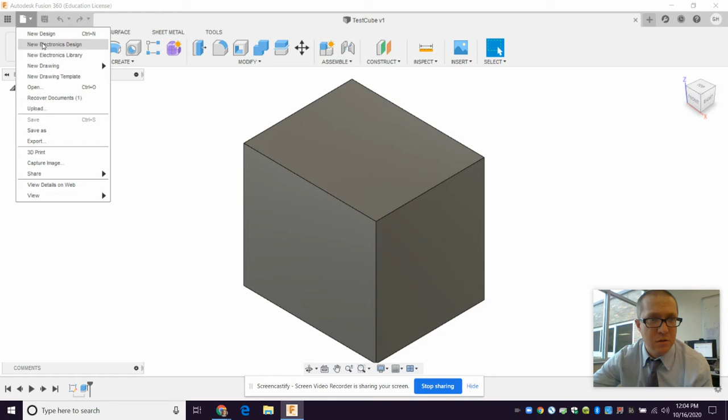You're in your part. You want to have your part open that you made. You're going to go up here to File, New Drawing, from Design. This little window pops up here. This is our usual options menu that seems to show up in Fusion 360. Contents, full assembly, create new, from scratch. We're not going to change that.

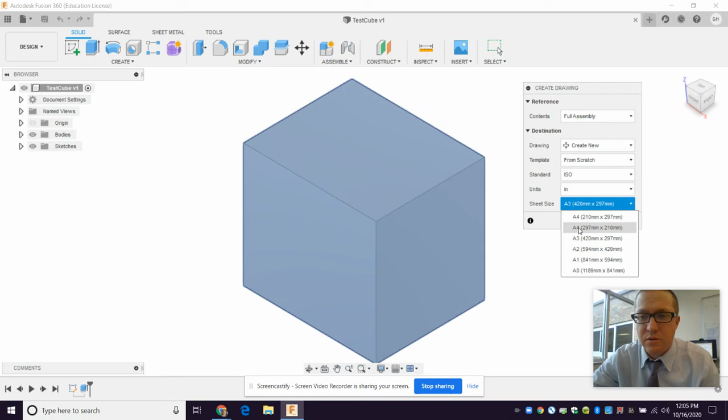Standard units, we're going to change to inches. And sheet size, we're going to change to A4, 297 by 210, which is standard 8.5 by 11 paper, but oriented so it's horizontal landscape. Now we hit OK. Takes a minute the first time you do this. I noticed that it gets faster the second time you do it. This is our window, our drawing, what it looks like.

It's got this huge box down here that we're going to get rid of actually. And then we can place our views in here. So we're placing the base view right now, the base view. This is a little bit different in Fusion 360 than it is in Inventor, but I'm going to go ahead and place the view first, and then I'm going to show you a couple things.

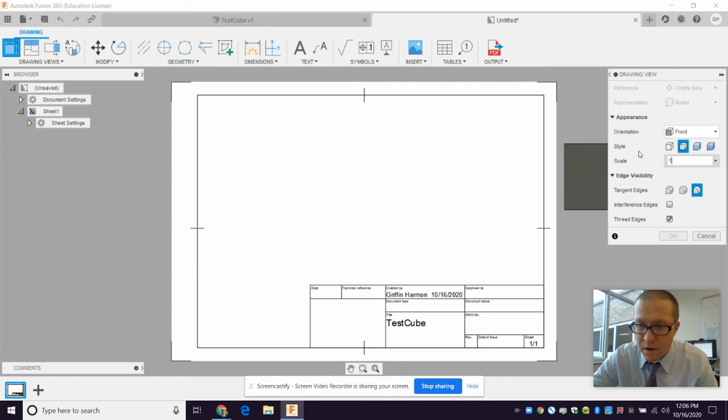Now notice it's kind of small. I might change the scale over here. You click that, you can do 1 to 1. Or if it's way too big, you can just type in like 0.75 or 0.3, and that acts like a multiplication factor. So I just want it to be 1. I'm going to place that base view right there. And the base view is always this front view. The front view must always go in the left bottom corner.

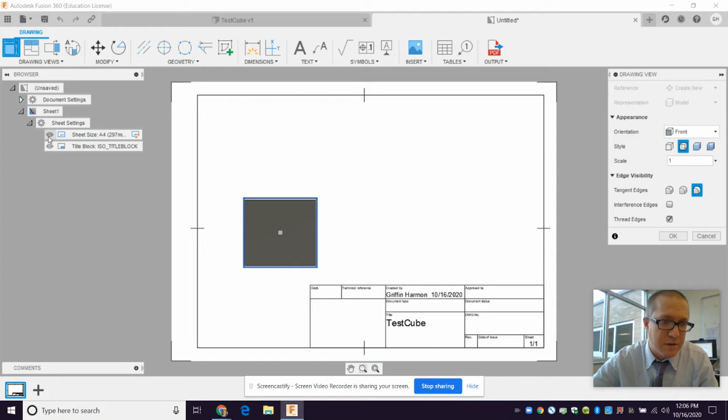All right, so now I want to get rid of this box here. That's over here under sheet settings, right here. I just turn off the visibility. I really love this, the way this works in Fusion 360. I just wish Fusion 360 ran a little faster on the computer. I don't know why it doesn't. Maybe I need a graphics card. But anyhow, turn that little eye and it gets rid of that visibility so you don't see that thing. Now I'm going to move this down a little bit. It doesn't do this very smoothly.

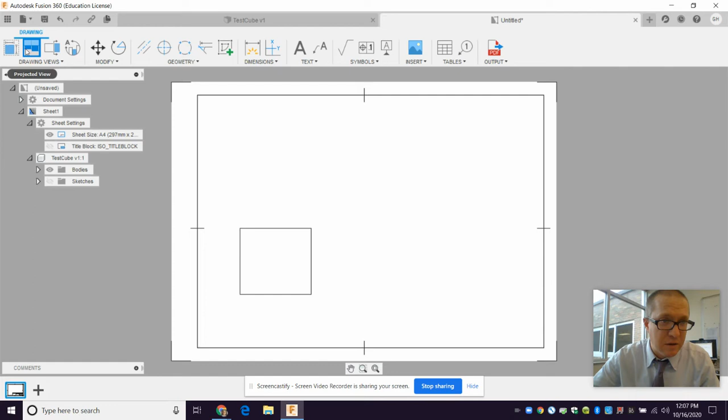And now I'm going to place projected views. So that's the front view. I need to place the top view, the side view, and what's called an isometric view up here. So I click projected view, and I have to click the parent view first. And then I drag up here, and that's going to show me what the top of it looks like. And then if I drag over here, it's going to show me what the side of it looks like. If I drag up here, it's going to show me what it looks like from kind of a weird home perspective. I might change that later on.

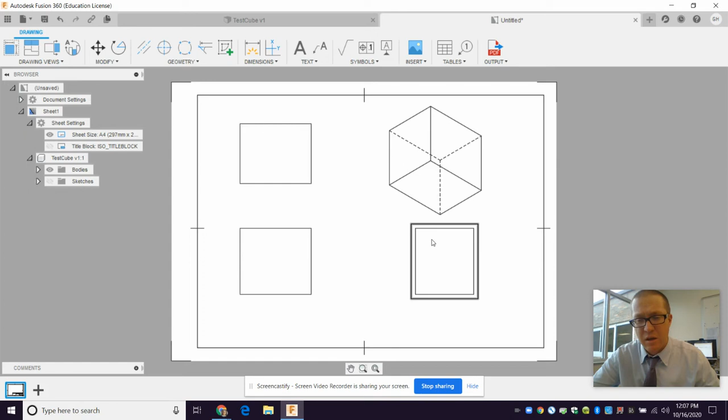And then when I'm done, I can either hit escape, I think, or the check marks. Let me try escape. Yeah, escape. Just like in Inventor Professional, for those of you that have switched back and forth or have used Professional.

So anyhow, here we are. If you want to move stuff, you can. Notice when you move this, it moves the other things that are fixed to it as well. Might move that over a little bit. Can't just put this anywhere, right? You can only move it left or right. It has to stay lined up with the other one, which is fine.

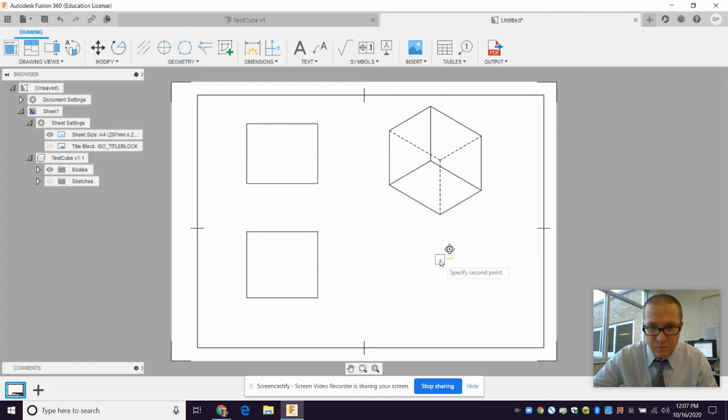This is a very boring looking mechanical drawing because it's just a cube. For this one here, I'm going to double click on it, and then I'm going to turn it on to be shaded. All right, so now I can see the whole thing.

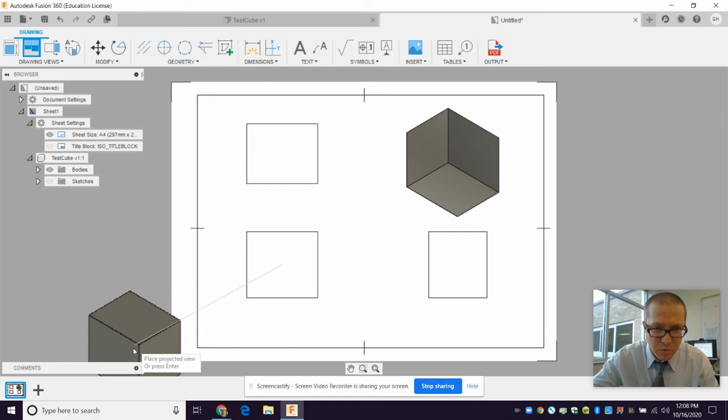And hit close. All right. I'm surprised you can't change that view here, but that's all right. It's kind of a weird view. I don't really love it, but it is what it is. I wonder if I did a projected view of it this way. Yeah, that's the way I would like it to be actually up there. So it's looking at it from that perspective, not from the bottom. Anyway, that'll do. This will just have to do for now.

So now I'm going to add some text. I'm going to add a text box down here. And it wants you to draw it, unfortunately. And then I type it in. Mr. Your name, not mine. Engineering 1, logo project. That's what you guys are doing right now. And then the date you're going to print it.

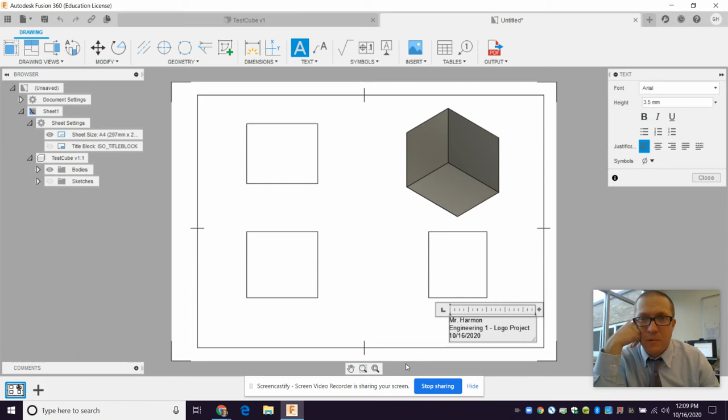10/16/2020. Now, if you don't have a printer at home and you're full remote for engineering, that's going to be interesting because your engineering notebook, you're supposed to be printing stuff out and putting stuff into your engineering notebook. So I'll have to think of a way.

Maybe what we can do is like a Google Doc engineering notebook where you just take pictures and put them in the Google Doc. I got to think about that. I hadn't thought about that for a while. I hadn't thought about that before. So let's see. Maybe a Google Doc engineering notebook is what we'll have to do. A virtual engineering notebook.

Probably should. So if you don't have a printer, basically do your engineering notebook, but do it in a Google Doc. All right. Take pictures of stuff or screenshots of stuff and paste them in there. I'll have to show you how to do that. Maybe I'll make a video.

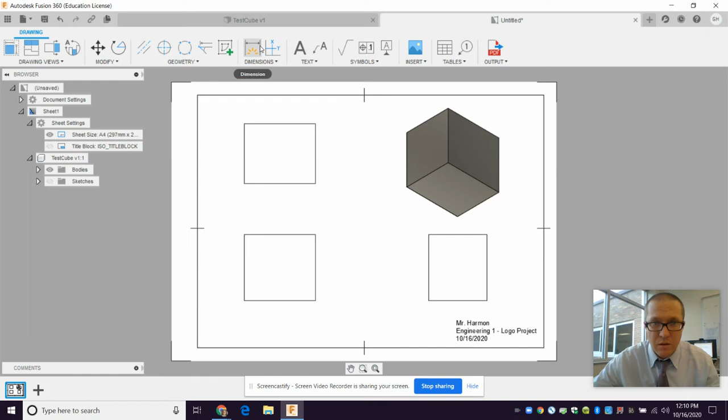All right. The last thing we want to do is add a couple dimensions. That's up here, right in the middle, dimension. And we're just going to do the main dimensions. Now, there's two ways to do dimensions. You can either click the line and drag down, or you can click 2 points and specify the distance between the points.

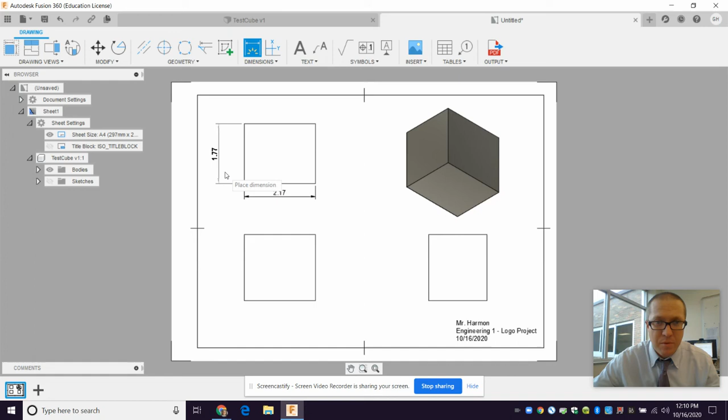For the logo project, the 2 points are probably going to be more useful. The width, and for your logo, you're going to want to put most of your dimensions in the top view, and then this one will do in that view. Just 3 dimensions, basic length, width, and height is plenty.

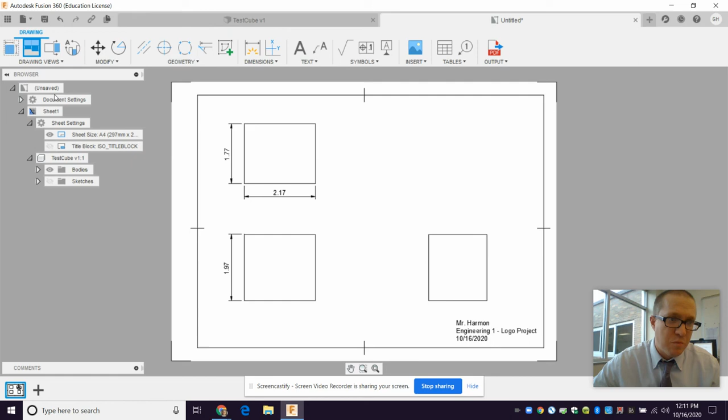I still don't love this view of this up here. I'm going to get rid of that view. I really just do not like that view like that. So I'm going to do projected view. Click this, but I'm going to drag it down here so it's looking from that top corner. Hit OK, and then I'm going to move that. I'm going to move it up here. I just like, that's the way the default is in professional. So I'm going to do that.

And that's it for this. That's it. You can, from here, you can print it. If you want to, if you're going to do a Google Doc engineering notebook, let's see, if you hit print here, yeah, it just wants to send it to a printer. I wonder if there's a way to export it.

Save it. Save it. I wonder if there's a way to export output PDF, output. So you can output it as a PDF file, but that doesn't help you. I was thinking like a JPEG.

So what you can do is screenshots. If you're on a Windows computer, right, and you want to put this into a Google Doc, you go here and you type snipping tool. All right. And you can highlight it.

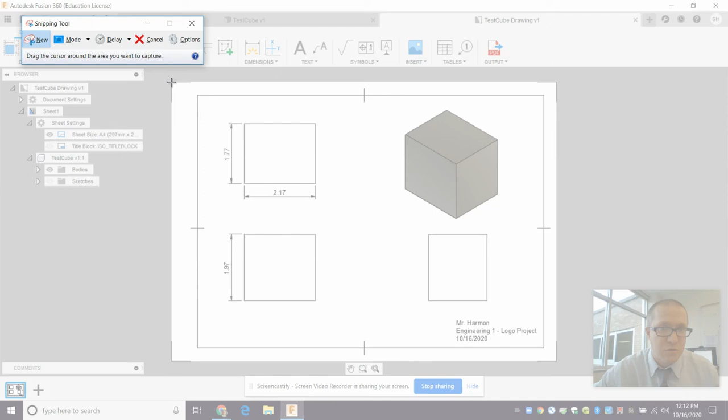And I guess most of you are doing this are probably on a Mac. So preview is what you'd use in Mac. Preview, you can take screenshots, and it's basically the same way. You highlight what you want. All right, and then you can save it as a JPEG, and then put that JPEG into your virtual engineering notebook. All right.

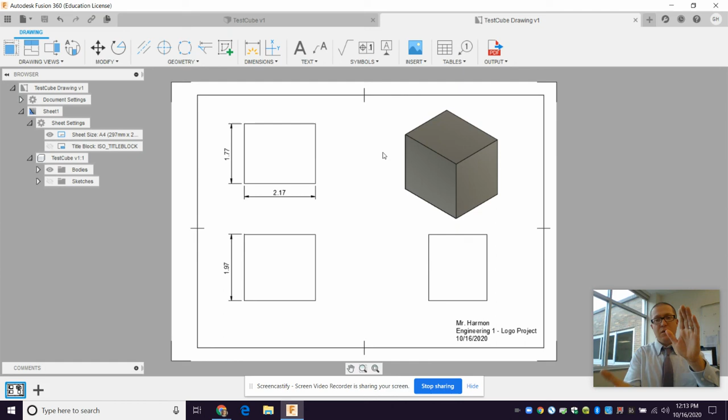All right. I'm going to make a separate video on that. So that's it for the mechanical drawing. If you have a printer, you print it, you fold it in half, tape it in your engineering notebook.

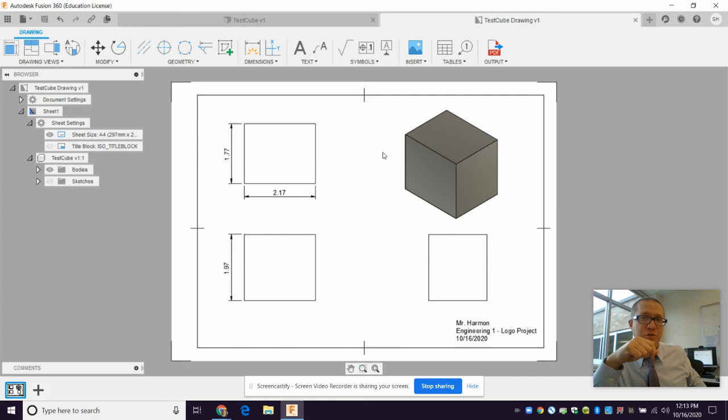Those of you who are working remote, one of you did get me your file to print, and I printed it. I gave it to somebody, and I think they sent you a picture. But if you are full remote and you haven't done that yet, why don't you do that? You can send me your finished STL file, export your STL file, follow the directions that I've put up, and get it to me, put it in the Dropbox, and I'll 3D print it for you, send you a picture.